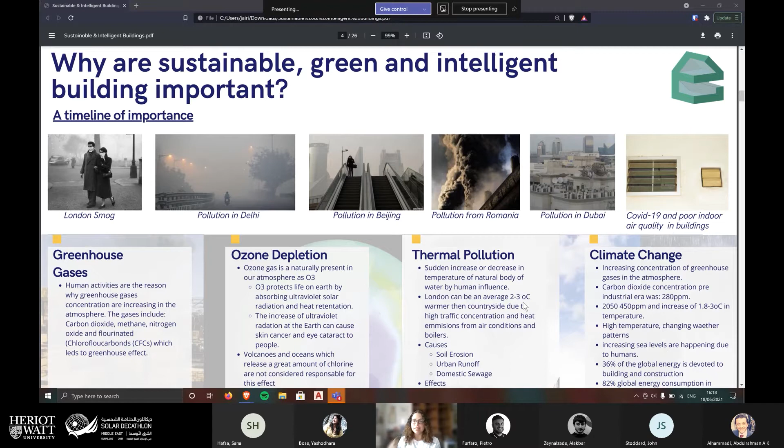What COVID-19 did to buildings was a wake-up call for us, the future building professionals, because we need to start building places considering not only outside energy performance, but also indoor air quality. Poor research and papers I did for my dissertation on COVID-19 found that the virus spread faster because of poor indoor air quality in buildings. There were actually some buildings that didn't have the ability to open a window, which is not good. That's the reason why we need to first look back in time to be able to pursue solutions in the future.

Of course, there are some topics we can talk about, like greenhouse gases. You might all know what it is - it's human activity that is the reason why greenhouse gas concentrations are increasing in the atmosphere. As you all know, some of the gases are carbon dioxide, methane, nitrogen oxide, CFCs. What do these gases do? Let's just touch on carbon dioxide.

This is coming from people. If you look out of your window, you can see how contaminated we are with cars. There are people who use like three cars, one person each, and this is not good. We need to start thinking about how we can remove even parking and things like that. All this human activity adds greenhouse gases to the atmosphere, trapping more heat than usual and contributing to global warming.

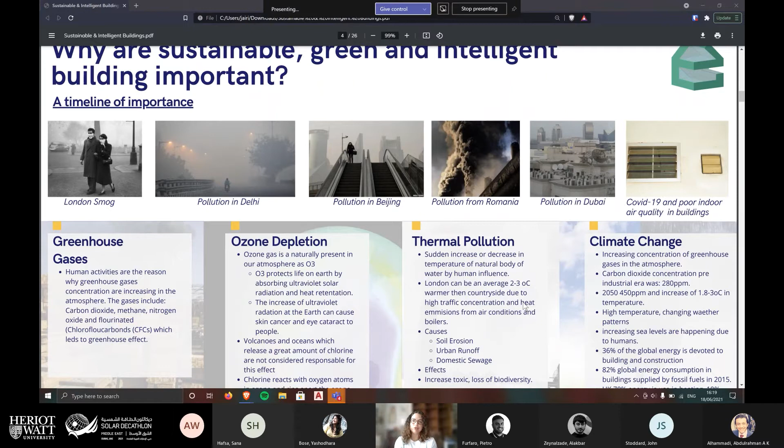In the past, there were some products such as aerosols, plastics, and refrigerants that contained CFCs, a chemical that is not good for the atmosphere because it has chlorine. This breaks down, and later on I'll talk about that. But because we saw that something happened, a solution was made - though we need to be more proactive about this. In 1989, the Montreal Protocol actually banned the production of ozone-depleting substances, which is good. But in the end, they have to first find the problem and then the solution.

So let's move on to ozone depletion. Ozone gas, as you all know, is naturally present in our atmosphere, and O3 protects life on Earth by absorbing ultraviolet solar radiation and retaining heat. So what if ultraviolet radiation increases? Well, we will have problems with our body - skin cancer and other problems as well. What I found last year in my course is that volcanoes and oceans are supposed to be releasing more, but it's not true - it's us. We are the reason why all this is happening.

And let's move on. Now we have thermal pollution - a sudden increase and decrease in temperature of natural bodies of water caused by human influence.

Again, let's touch on London. It's an average of 2 to 3 Celsius warmer because of the high concentration of traffic and the heat emissions from air conditioning and boilers.

You might think, why do we need to care about thermal pollution? Well, because it's caused by us—by deforestation, urban runoff, and also water used as a cooling agent for power plants and manufacturing industry. So we need to start caring about this.

Another thing I found interesting was domestic sewage. For example, there are companies that are not treating their wastewater and are just dumping it in the ocean. That's not good. As building professionals, we need to start thinking about this. What does it affect? It increases toxins, decreases dissolved oxygen, we have a lot of biodiversity loss, and our health and well-being is even worse.

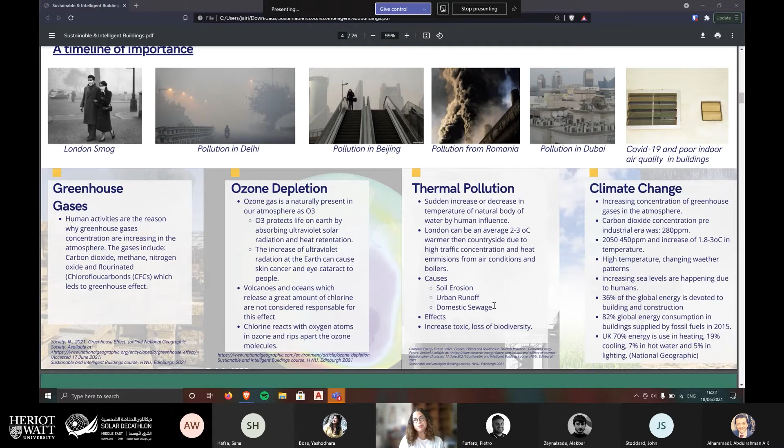So what are the things we can do? As professionals, we can start thinking about water recycling, cooling towers, cooling pumps, and we need to make this decision. Now let's move on to climate change.

Climate change is the increasing concentration of greenhouse gases in the atmosphere—carbon dioxide, for example. Before the pre-industrial era, it was 280, and it's estimated that by 2050 it's going to be 450, which means an increase in temperature of 1.8 to 3 degrees.

That high temperature, what does it cause? We all know it causes changes in the weather, and it also causes increased sea levels. Why do I mention all these things? Because 36% of global energy is devoted to building and construction, and 82% of global energy consumption in buildings is supplied by fossil fuel.

This was in 2015—hopefully that changed by now, but I didn't have the correct data due to lack of time. We also need to think about, okay, these buildings are causing all these bad things, but how can we improve them?

We also need to think about the statistics. For example, in the UK, 70% of energy is used for heating, so whenever you are designing a building, you need to think about how you can improve the heating. Then you have 19% in cooling—that's not too much, but we still need to think about it. Then 7% in hot water, which was actually surprising, I thought it was more. And 5% in lighting, which means yes, we are trying to tackle lighting, but we just need to move on to the heating as well.

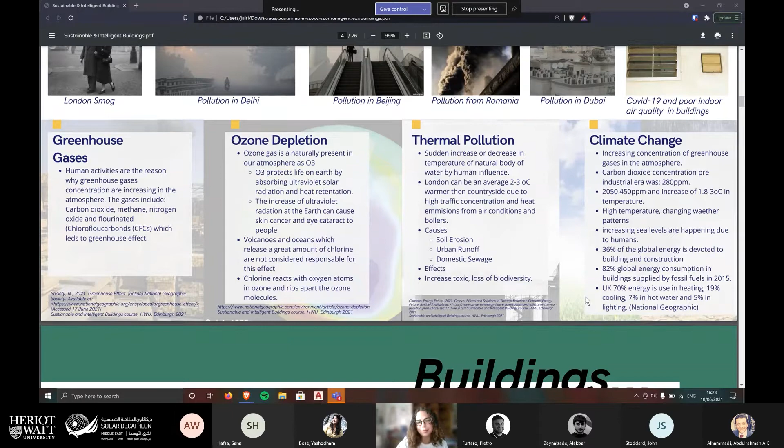Now that we know a little background, let's start with the buildings, because that's why we came here, right? Buildings are a key component in the fabric of the city. This is true, but it doesn't have to be the main component—we also have landscapes and parks that all complement each other, like in some smart cities I've seen where everything complements one another.

So what is a building? Everyone can define it how they please, but it is a structure intended for the shelter, housing, or enclosure of a person, animals, or chattels. For the construction industry, this is one of the most important industries, and we have the opportunity to reduce environmental impact and contribute to sustainable goals, at both small and big scale, which we'll touch on later.

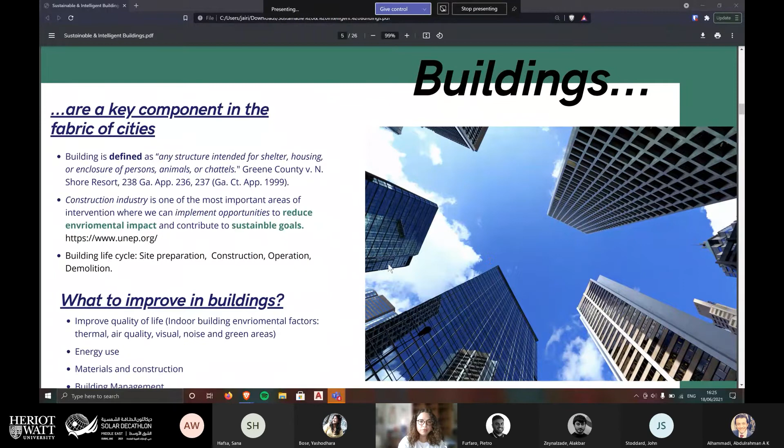The building life cycle, for those who don't know, includes site preparation, construction, operation, demolition, but there's much more as well. So how can we improve buildings? This is just a small idea of how you can improve it, because I'll be touching on more later. You can improve the quality of life.

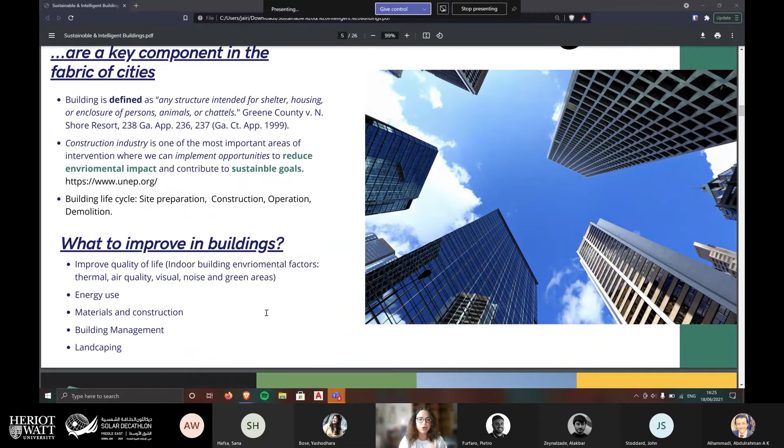This is a good thing. We need to plan to be active and not waste a lot. Planning is good in this, and of course landscaping. Let's move on.

Okay, so what should a building have? A building should have many things, but I just listed a few of them because otherwise we'll stay here all day. So it should enhance biodiversity, minimize pollution, and transport and processing. It should manage every single aspect of the life cycle of a building as well, which I will touch on later. It should support communities. You shouldn't build something if it's not supporting a community because that doesn't make sense and it doesn't go with the three pillars of sustainability that we will be touching on in the future.

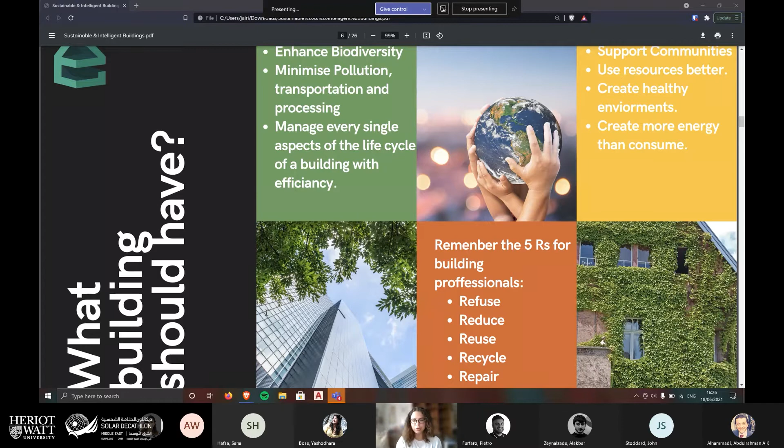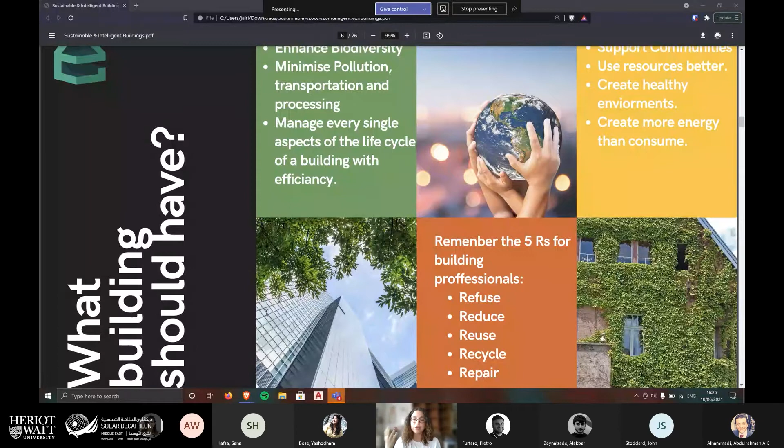It should also create healthy environments, and it should create more energy than it consumes - never less. And also, as building professionals, we need to start thinking about the 5 R's, which we might all know. If you don't know it, try to print this in your mind because that is going to help you in the future: refuse, reduce, reuse, recycle, and repair. This is something we have to start thinking about in the future as well.

Okay, let's move on. So now, what are sustainable buildings? I try to find some of the definitions about what a sustainable building is, and it's designing, constructing, managing buildings in such a way that the building occupants' needs are met without the excessive use of energy and resources, so that enough provision is left for future generations to provide for themselves. This is what I've been saying before, but in a more professional way.

Also, the United Nations Environment Programme for Sustainability in Buildings and Construction Sectors says that sustainable buildings are an active process where policies and incentives provided by the government support sustainable building, as well as insurance companies, property developers, and tenants who are aware of sustainability considerations and take a role. So what does that mean? It means that not only engineers, not only people working in the industry - we all need to learn about sustainable buildings because this is an investment for the future.

Maybe not for me, maybe not for you, but for people who are going to be here in this planet 20, 30, 40 years from now - we need to start from today. And also, I don't know if you know the organization ISO, International Organization for Standardization. It defines sustainable building as the overall quality of the process that enables the delivery of sustainable buildings, and it needs to have three main requisites, which are sustainable technology, methods, and knowledge and constant development.

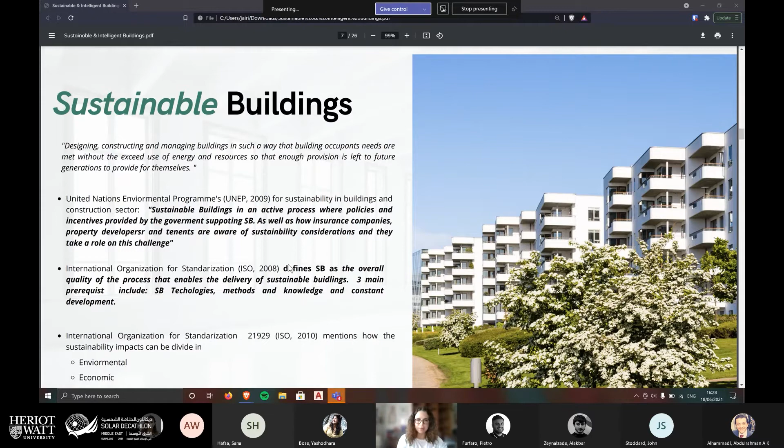This is good because if ISO says it, it means that we all need to start learning about this. But it also mentions what I said before: yes, sustainable buildings can stand on their own, but they also need to try to take part in the sustainable impacts, which are environmental, economical, and social.

Okay, and I will move on. So what are these pillars of sustainability? As I said, there are three, as you can see here, and I'm going to give a brief introduction to all of them. For example, the environmental pillar requires that the natural capital remains intact - the natural capital being water, land, energy - that the extraction of renewable energy should not be higher than the rate at which it renews. This is a sentence we should have printed in our mind. And waste should be avoided or eliminated where possible, and we should move from a linear to a circular life cycle for any resources, managing to operate within the limits of the world's nature and resources.

Then when we move to economic: government and business use their resources and operate responsibly to make a profit. Again, you are not going to build a building that then destroys the environment and the social impact - they should all work together. To make sure that everyone can enjoy a fulfilling life, all must be inclusive and equal.

I know in this world we still don't have inclusivity and equality, but we are working towards this all together. And economical value, of course - you are not going to build a building that doesn't have economical value, because this is not going to be a profit, it's going to be a waste.

And when you build buildings around the pillars of sustainability, you will see productivity, which I will talk about in future slides. Economic growth must be supported by the social and environmental to be able to protect and achieve sustainability.

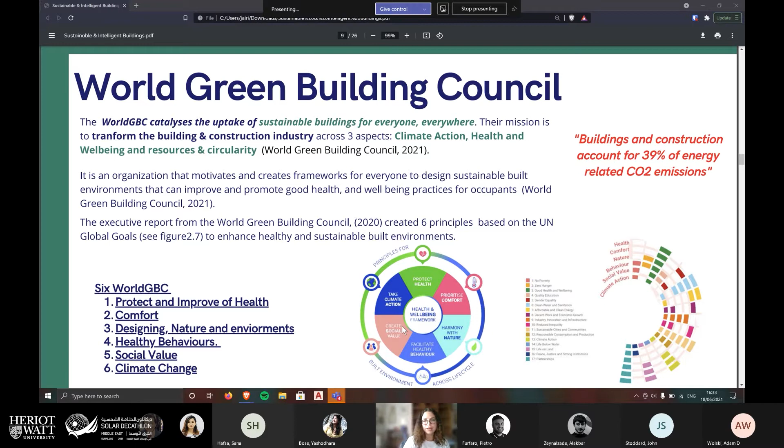All of this is important to know to be able to construct a sustainable building, because building and construction accounts for 39% of the energy-related CO2 emissions. So we need to start learning to be able to improve it, and we also need to know the problem to be able to solve it with a solution.

The World Green Building Council—I did part of my dissertation on this—and they have a fabulous website because you can find all the information you need there.

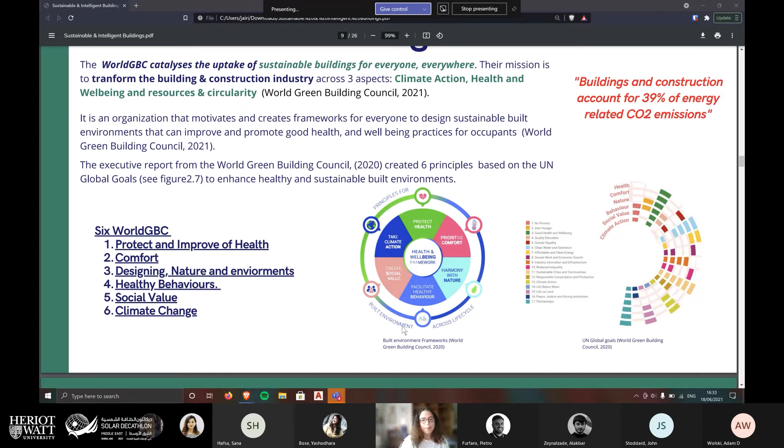For people who are going to do their dissertation this year, this is a website to go to, because I'm going to show you here, they have online case studies from all over the world where they show buildings, and you can look at them by building type, sustainability focus, system, or rating, which I'll be talking about later.

So you just click on one of them. If you want to know, for example, about the United States, you just click on it and you find a case study. For my dissertation, I actually did a case study about a building located in Romania, which I'm going to show you here.

So this building, the certificate was given by BREEAM, but why? It had a Class A level, which is one of the best classes. But why? Because what they did is the organization that took it on was an industry factory.

This place in the middle of the city, it was nothing—it was just a factory producing CO2 emissions, doing nothing. So this firm contacted BREEAM, which I'm going to explain later, how a building can become BREEAM certified.

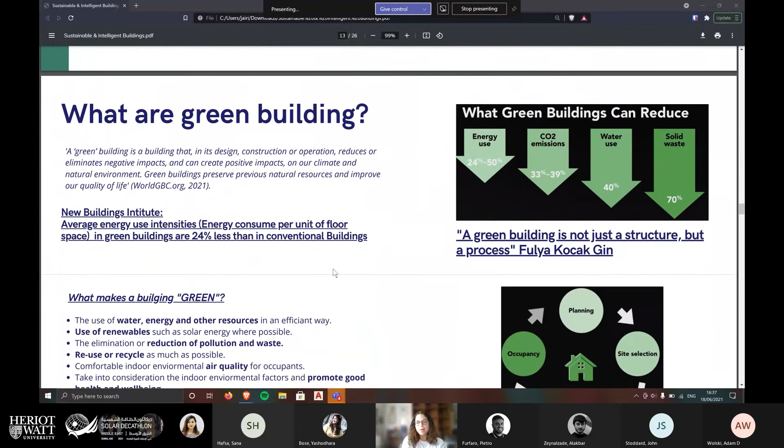But how do we know what green buildings are, or how we can make a green building work? A green building is a building that, in its design, construction, or operation, reduces or eliminates negative impact and can create a positive impact on our climate and natural environment. Green buildings preserve natural resources and improve our quality of life.

I like this sentence because when we go into the industry, it's printed in our brains that it is a structure, and we need to think about materials, performance, and modeling. But it's not only that. A green building is not just a structure. It is a process that we all need to work together on to make it better.

The New Buildings Institute said that the average energy use intensity, which is the energy consumed per unit of floor in a green building, is around 24% less than a conventional building. Nevertheless, this could be lower depending on the demand and what we want in a building.

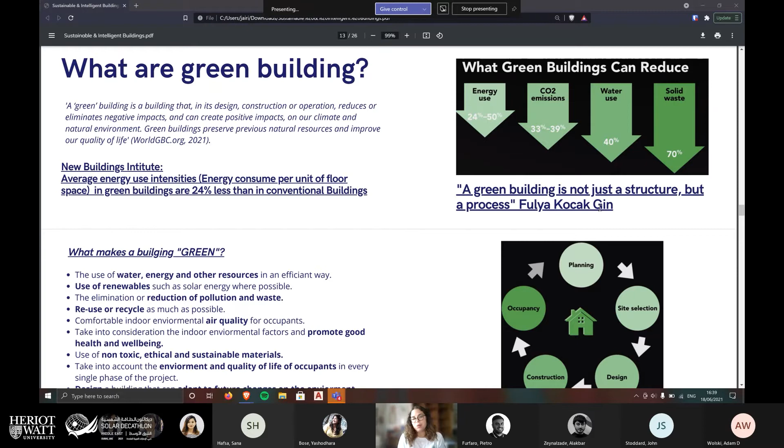So, what makes a building green? This is a repeating thing because all the information I found actually teaches this. Once you get out of the seminar and start looking online, you will see these repeated things as well.

It's the use of water, energy, and other resources in an efficient way. The use of renewables such as solar energy where possible, because not everywhere can use solar energy, so you need to think about other renewable sources as well. The elimination or reduction of pollution and waste, and how you can reduce waste before planning, as you can see here. I'm going to tell you this later.

Reuse and recycle as much as possible. Comfort and indoor air quality - yes, we need to consider the indoor air quality for occupants. We need to take into consideration good and healthy well-being as well. I'm not saying don't forget, but we also need to think about using non-toxic, ethical, and sustainable materials.

We also need to model and think about energy performance, and again the quality of life. We also need to think about designing buildings that are resilient, that are able to adapt for future changes in our environment, so that if there is a disaster, they could be modular and functional when possible.

Of course, if you're going to make a building that is 20 stories tall, making it functional or modular might be a bit of a challenge. Maybe in the future we'll be able to do it, but it's always about trying to innovate and see how we can make it better.

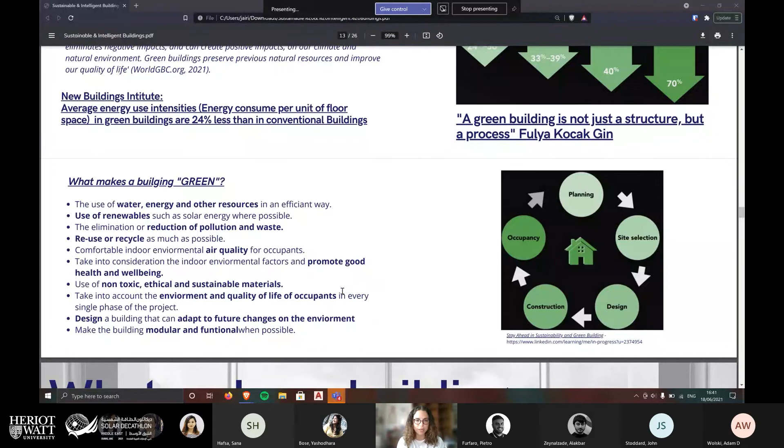As I said before, everything has to start from the planning. This makes me think about this team house. We haven't constructed yet, we're now constructing, but before that we had so much planning to reduce waste, have good energy, nice non-toxic materials. It all started in the planning, moving on to site, design, construction, and occupancy — this is the circular process that you need to think about as well.

Okay, so what makes a green building again? In this section I'm going to touch more on how we can improve each of them as well. Just give me one second.

Okay, so let's start with site and location. Site allocation: transportation accounts for 30% of greenhouse gas emissions. So what does that mean? We need to organize and plan how we can get to the site without using 5 cars for 5 people.

Better to reduce it. Avoid choosing certain sites — this should be something we should all know. Do not use farmlands. Why do we need to construct a building if it has beautiful fruits and trees and the environment is so nice, and then we come there with our building? No, unless it's very sustainable, we shouldn't do it.

The wetlands, local habitat, and flood sites — we need to try to avoid these.

A green building reduces single drives, as I already said, by providing services accessible by foot or public transit. Whenever you are choosing a site, try to look around. Are people able to not drive, and instead take a bus and just walk into the building? Yes? Then this is the site that I want. Or are they not? How can I make this happen? How can I make it better for people?

This is going to reduce the parking, less CO2, less energy as well, less money we have to invest. Some of the things I was looking at online suggest it's better to do refurbishment or use sites that were already developed, that already had infrastructure, as well as transportation methods.

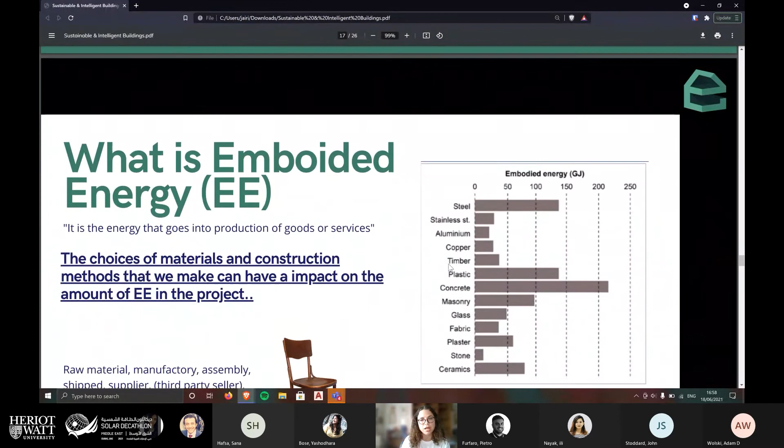And let's move on to embodied energy. I'll just talk about it briefly because we just need to know.

It is the energy that goes into a project. The choices of material and construction methods we make impacts the amount of embodied energy as well. So think about the chair you're sitting at. It came from a raw material, then went to a manufacturer, was assembled, then shipped to the supplier, maybe through a third party, which then goes to you.

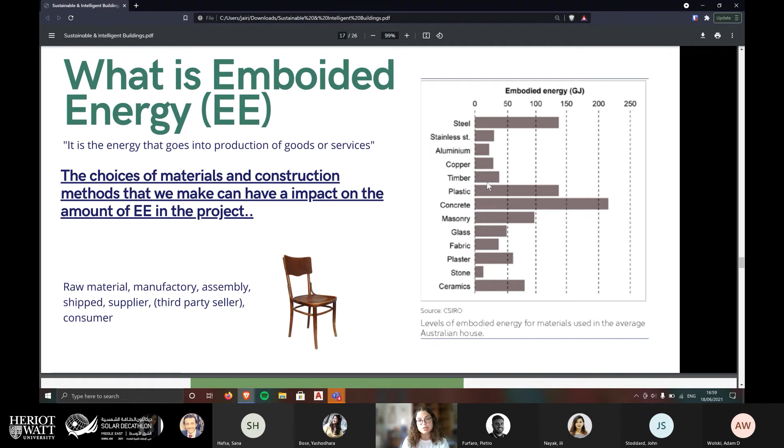That's the reason why, to reduce it, we need to buy local. Always think about that. These are the materials that have more embodied energy, and we can see timber, which is what we're using for the ESTEEM house, is less, which is good because we thought about that in the planning stage.

Before I talk about green building rating tools, I'll briefly talk about two: LEED, which is the Leadership in Energy and Environmental Design, launched in 1998, and BREEAM, the Building Research Establishment Environmental Assessment Method, from 1990.

I'm going to start with LEED. LEED is popular in the United States, but I found out through my dissertation supervisor that it's also popular in Dubai. The rating system covers new construction, interior fittings, existing buildings, homes, and neighborhoods. The LEED version is renewed every 3 years because technologies and sustainability standards update, so they need to keep up.

The LEED certificate is composed of prerequisites and credits, but every project must meet the prerequisites first before you can get a certificate. The total amount you can score is 110 points. There are 4 levels: Platinum is the top, more than 80 points; Gold, 60 to 79; Silver; and Certified, which is 40 to 49, which most business buildings achieve.

Now that we've talked about sustainable buildings, I'll talk very briefly about intelligent buildings since we don't have a lot of time. When you ask what is an intelligent building, people first say it's a building with high-tech technology like AR, VR, and more. But for us, it's a building that combines innovative technology with great management skill to increase return on investment, always thinking about investment in the future.

Another definition I found in my course notes this last semester: it's a building equipped with systems that enable it to continuously respond and adapt to changes in condition, which allows more efficient resources and increases the comfort and security of occupants.

What does an intelligent building have? There are two parts - an integrated system or a separate system. I won't go into detail, but you can find it online if you want. It has to have energy efficient climate controls, life safety system, telecommunication, sensors and software, of course, and a workplace.

And what is a workplace? It's where everybody, where all this data comes together so they can work all together.

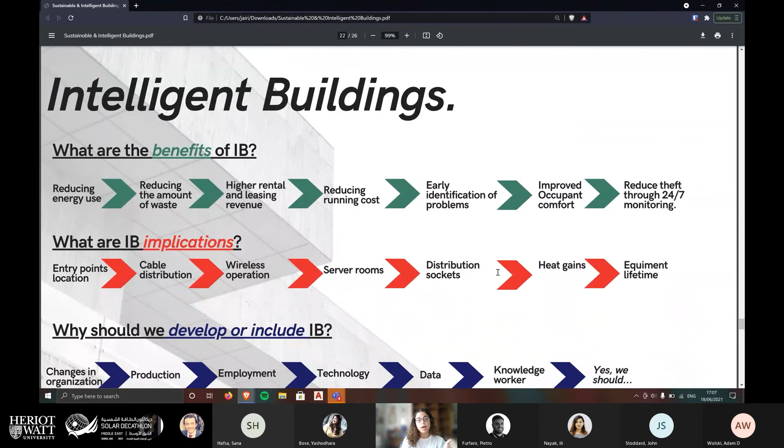Okay, moving on. So what are the benefits of intelligent buildings? They reduce energy, they reduce waste. If you have an intelligent building, your rent is higher - of course, you can ask for more money.

It reduces the running costs because you're able to know about problems beforehand or when they're happening. It identifies early problems, improves occupant comfort, and has 24/7 surveillance monitoring, which is good.

There are some implications as with everything, and you need to find entry points - location and cable distribution is a big thing in this building. Also, if you have a 20 storey building and a wireless operation, server room - right now there aren't too many server rooms, but it's another thing to think about. You need to have these spaces if you want to implement it.

There is distribution socket, heat gain - you have all this equipment, so of course you're going to have heat gain, and the equipment lifetime.

So you need to think about what you're going to do if this is damaged - repair it, or you don't need to use it anymore, so you start again. This is all planning as well, to avoid waste.

And why should we develop or include it? Because if we change the organization - for example, in a team we change the organization every 6 months - all this data has to be collected in one place. So when it changes, the new people are able to find it, instead of before, where if one company buys another company, they had a lot of papers everywhere and you couldn't find the information. Now with this, it's easier for us.

And it's good because we need to start implementing this. Yes, sometimes we think smart homes are very expensive, but remember, it's always an investment for the future. So now I'm just going to move on to our Team ESTEEM project, because of course we have a sustainable and intelligent house.

And as you can see here, we have different heights which contribute to natural light and also enhancing happiness - when you look up at the sky, people are happy because they can see the sky instead of a roof with nothing on it. So we are using that in our favor.

We also have the entrance - as I said, remember when I mentioned the passive strategies? This is when we started thinking about passive strategy before we even constructed. So we thought about the entrance being on the northern side to provide shade for visitors. This is going to be in Edinburgh and Dubai, so they are not affected by the weather conditions as well.

We also have a garden space around the house, and this garden space is going to be utilized by a gray water system, so we don't need to use fresh water for this, which is good because again we started to think about how we can reduce energy.

As you can see here, we also think about the material. I said timber had a low embodied energy. We are using prefabricated timber panels, transported and assembled on site with a system from ASGC, and the large cross-laminated timber panels, which are also from Scotland and the Construction Scotland Innovation Center.

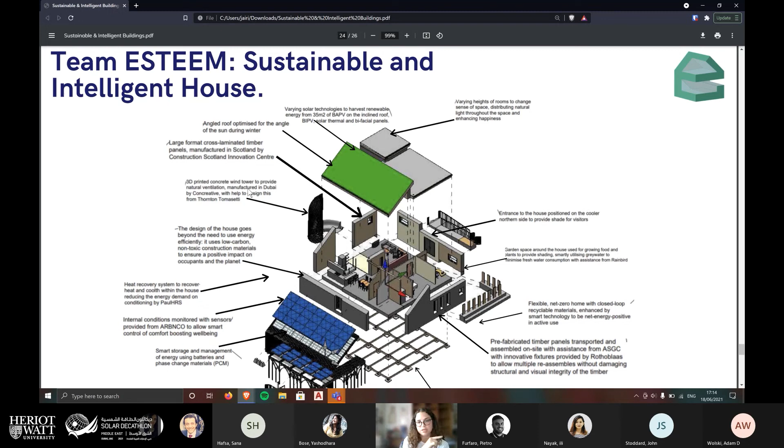And then when we think about other aspects of the house, these are just a few, and I do welcome you to look at our website because there is more information there, which one of our colleagues is working on. We also have, for example, these arches that are decorative on the southern side.

They work both ways: they reduce the carbon footprint, and they also look as shading for the car, which is good as well. On the intelligence side, we have smart storage and management of energy using battery and phase change material.

We also have internal condition monitoring with sensors provided from ARBNCO, one of our sponsors, to allow smart control of comfort, boosting well-being. Again, we are thinking about the people that are going to be living inside.

Then when it goes to the system, we have a heat recovery system to recover heat and coolth within the house, reducing the energy demand on conditioning, again thanks to another sponsor. This is a combined collaboration with PaulHRS.

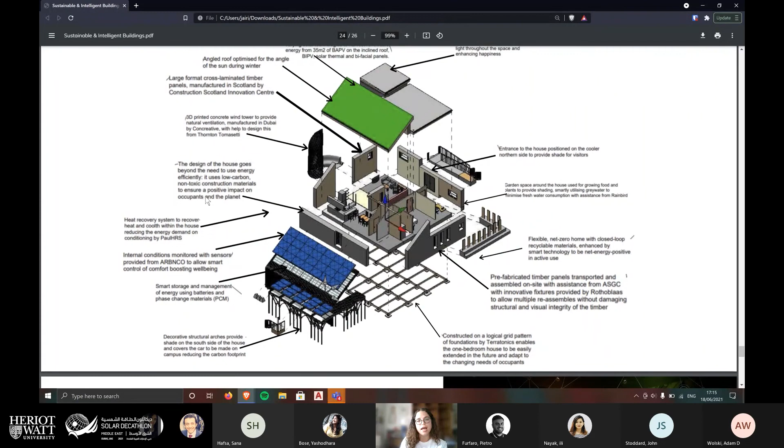And we have a 3D printed tower as well that provides natural ventilation. Again, this wind tower is not going to be traveling to Edinburgh. It's going to be done in Dubai and assembled in Dubai again to reduce its carbon footprint, and then we can transport it. And when you see this angled roof, it's designed to optimize the angle of the sun during the winter season. Again, we start thinking about the people inside.

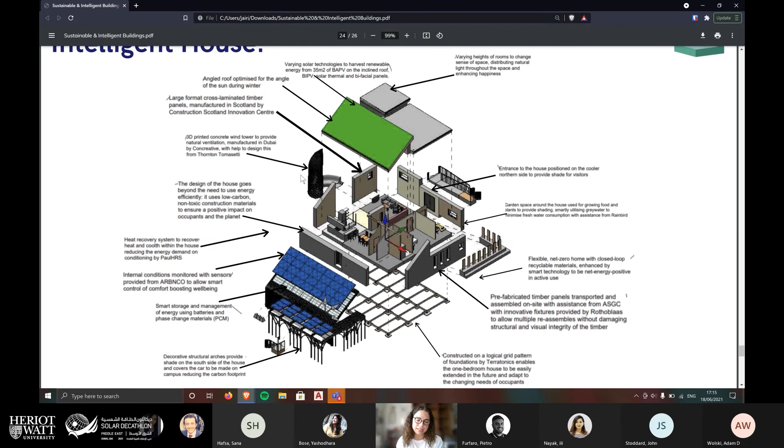And all these things I've been talking about - sustainability, intelligent green buildings, and the SDME and the STEAM house - we need to think about how we can share this.

And that's when my passion for digital marketing comes in, because we are only able to make people aware of what is going on in the world if we are actually able to reach them through social media or digital marketing. Otherwise, if you don't know what is going on in the world and you don't know how to solve it, or if you're not the kind of person who likes to read at all but spends all the time on social media, you're still able to see and be aware of this, and even share it. So more participation, more people are able to know this.

And this is the end. So thank you for listening, everyone. I know it was very, very long, but thank you for listening. I'm just going to stop sharing.

Thank you, thank you, thank you. That was indeed a very descriptive and informative presentation. For me personally, studying renewable energy development, there were a couple of things I wasn't aware of, and this has definitely helped enhance my knowledge. So thank you for that, Iris.

We have really short, little time left, but if anyone has any questions, you could write it in the chat box or raise your virtual hands, and while people do that, I have a couple of questions from the registration form. So, Iris, if you'd like to answer this: which is better, sustainable or intelligent building, and why?